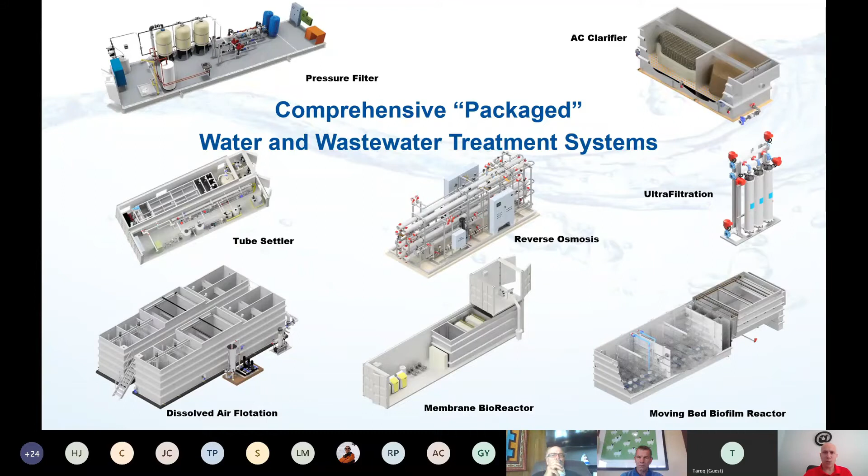So as promised, today we're going to focus on MBBRs.

Let me make sure we add everybody else that's logging in a little late. Good morning, Ken. So with that, John, if you want to share your screen and take it away. Yep, thank you, Alex. Let's switch on here. Everyone see my screen? Not yet. Go ahead. Okay. There we go. Now we're good. Good. Super.

I just would like to make one little correction. I'm not going to be talking about everything there is to know about MBBRs. We've only got 15 minutes or so, so we'll keep it brief and high level, and just move forward here to our first slide.

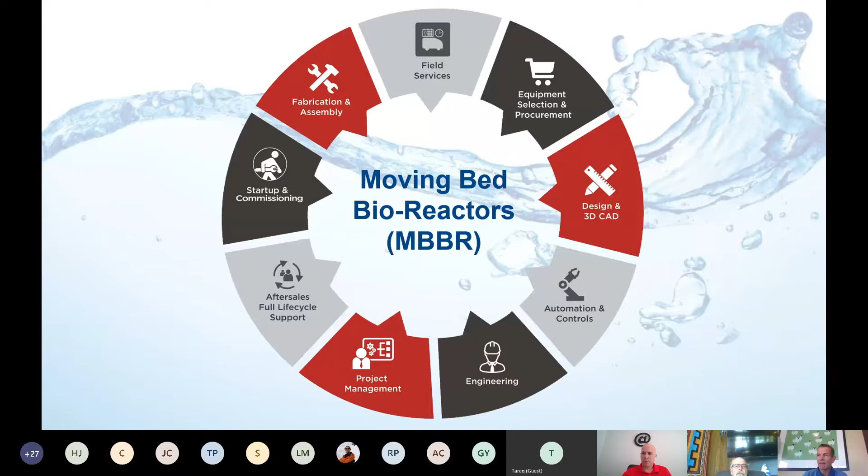So what is an MBBR? Moving Bed Bio-Reactor, or biofilm reactor. I've seen it both ways. Essentially, it's another form of aerobic wastewater treatment, typically using air blowers and air diffusers to raise the dissolved oxygen level. And everyone pretty much knows that game.

It originally was developed in Scandinavia by Kaldnes for high-strength fish waste, and over the last 40 years, it's gravitated over to North America, and it's become quite popular now for various application reasons.

The key differentiator from most aerobic wastewater processes is the use of the small carrier biofilm chips. Those chips are actually semi-buoyant, and they support the biofilm, enabling a much higher concentration of organisms within the actual tank volume. So a lot of benefits towards that.

And you'll see them popping up now in many different areas, domestic sewage, of course, but also because of the concentration of the aerobic microorganisms, they actually are very, very good for high strength waste. And I've listed a few of them there. We see them in ammonia removal, leachate treatment, and some new evolutions going on now with lagoon cold weather nitrification.

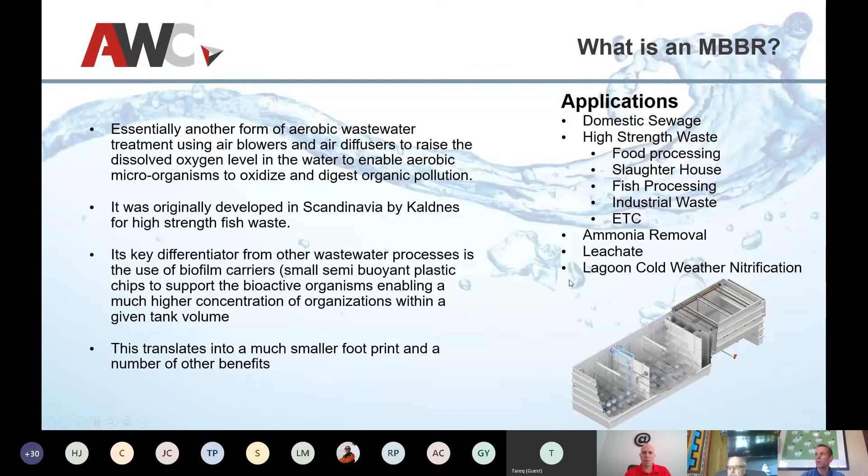So the basic components of an MBBR system is the bioreactor, and you can see here in a modular plant that we would manufacture. The first zone is an aerobic zone typically used to remove the BOD preferentially. Now, with an MBBR, if you need to nitrify, it's important that you remove the BOD first, and then the nitrification organisms can actually take over and do a very efficient job of reducing the ammonia to nitrate.

And this is typically done with these two tanks, and you'll see in the top right corner of the first tank, there's a media retention screen which retains the media in the tank, and you can see the aeration grid in blue at the bottom. So essentially coarse or medium bubble aeration is used, and in part that is to impart good mixing on the biochips to assure that they're kept agitated and sloughing the biofilm off as required.

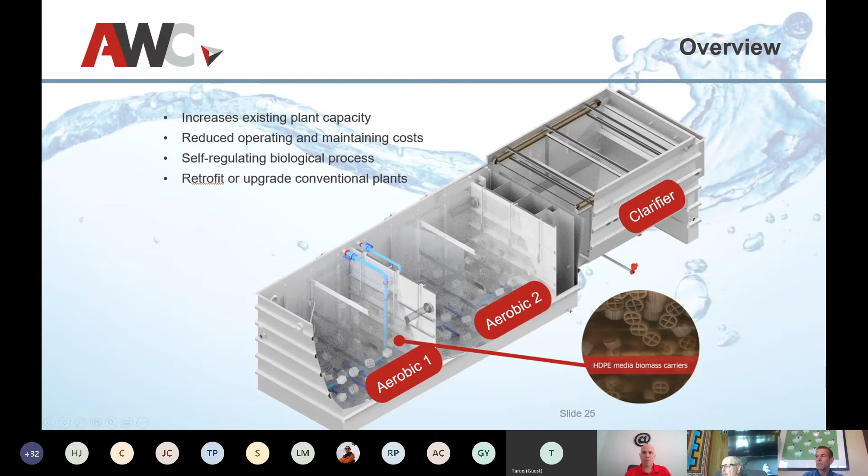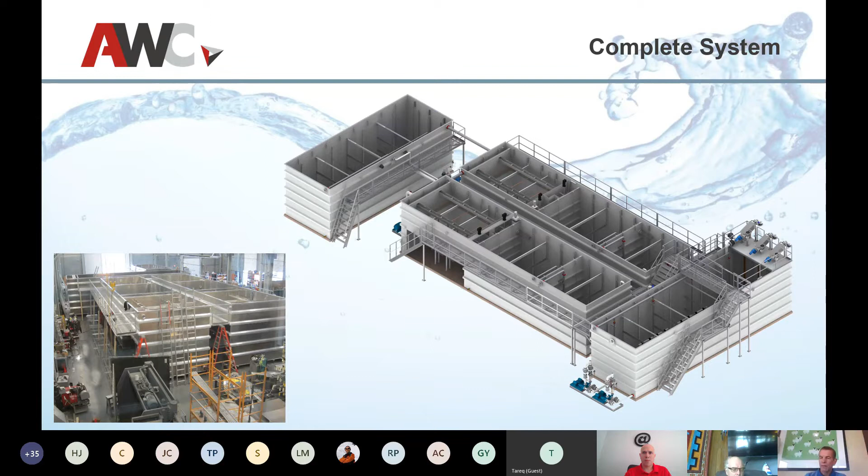The other one is the internal protected area. And you can see when you look at the biofilm chips that there's certain areas where agitation will not actually knock the biofilm out. And so that is known as the protected area. And that's important to develop the high concentrations of the biomass. That concentration is important because the more biomass that you can put in a tank and keep aerated, the higher organic loadings that you can treat within a given volume. And that's why the MBBRs are very, very popular, because they're very compact bioreactors.

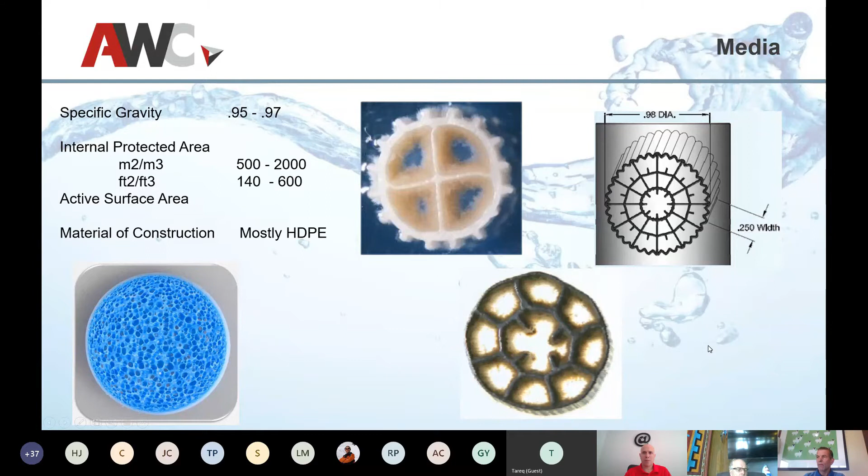Now, for nutrient removal, I have been talking about the basic MBBR, which is a straight through process. Basically, the sewage goes through once, there is no return activated sludge, and the solids essentially settle out in the clarifier, pumped out to the tank, and the clarified effluent goes to disposal or reuse as the application may require.

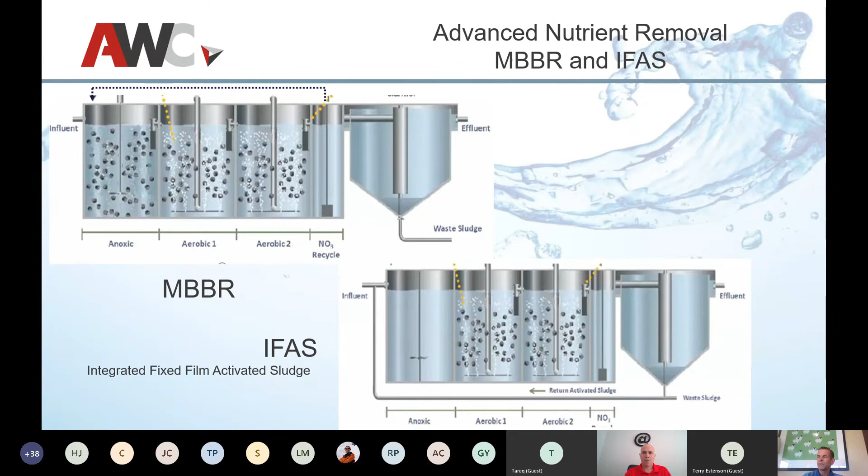So I mentioned there's a number of benefits of the MBBR. Essentially, it's a self-regulating biomass. So as the organics come in, the biomass basically oxidizes and grows cell mass, and there's a need to control, in most plants, that waste sludge operation. The MBBR doesn't require that. As the biofilm grows and it gets out of its protected zone, it basically sloughs off and is brought into the clarifier and removed. So there's very, very little you need to do to operate these plants successfully.

And that process also helps as loadings change. If we get a large organic loading coming in, the biofilm will just grow. There'll be more biofilm on the chips. As the loading drops off, the biofilm will slough off. So it self-regulates, minimizing the operational support. It's also, importantly, at steady state. You just basically keep the fluid going and the aeration on, and it's doing its job. There's no other control requirements.

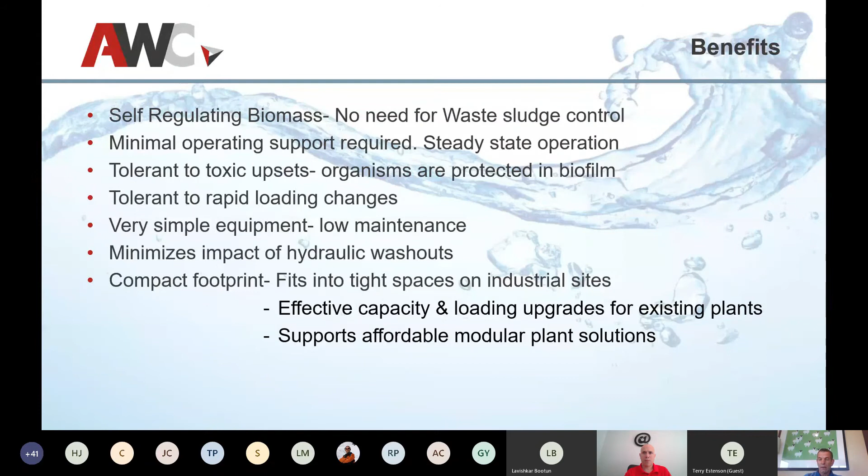And because it is compact, we can also provide these plants as modular solutions. So complete plants, relatively large plants, can be shipped direct to site for plug and play installation. So this is a large plant that we finished about 2 years ago, and it shows three MBBR trains with zone 1 and zone 2, and these were done in concrete. There's a 3D picture coming up. And it's followed by 2 modular DAF trains.

And we really like the DAF trains, Dissolved Air Flotation, for clarifiers, just because the MBBR sludge tends to be quite light and wants to float. So by far the most efficient way to remove it is with dissolved air flotation. And that also gives you a huge advantage in sludge management, because instead of getting like a 0.3% sludge out of a conventional clarifier, we're able to get 3% or more out of the dissolved air flotation, greatly simplifying sludge management.

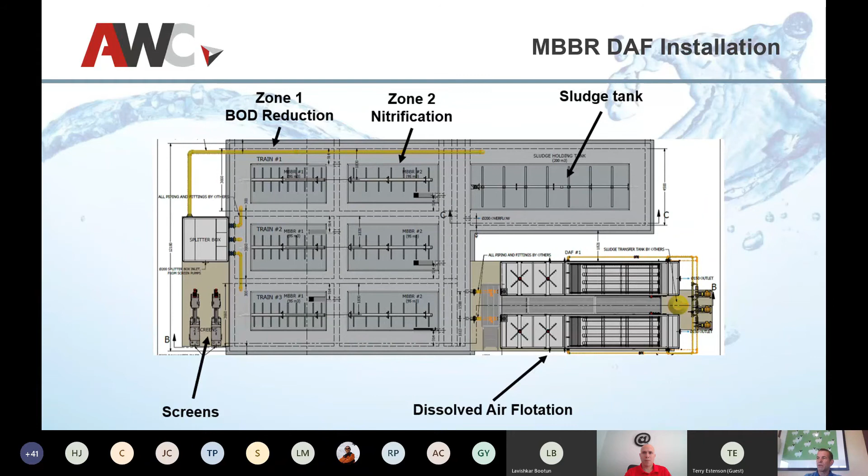There's a picture of the concrete tanks with the modular dissolved air flotation clarifiers tucked away in the corner there. And one of the big factors with the tanks is cost. Obviously, the more economical you can build a reliable tank, the more economical you can make your plant. And certainly a lot of MBBRs end up going into glass-lined, steel-bolted tanks, and they just provide a great dollar value in the sense of capacity for a given capital dollar.

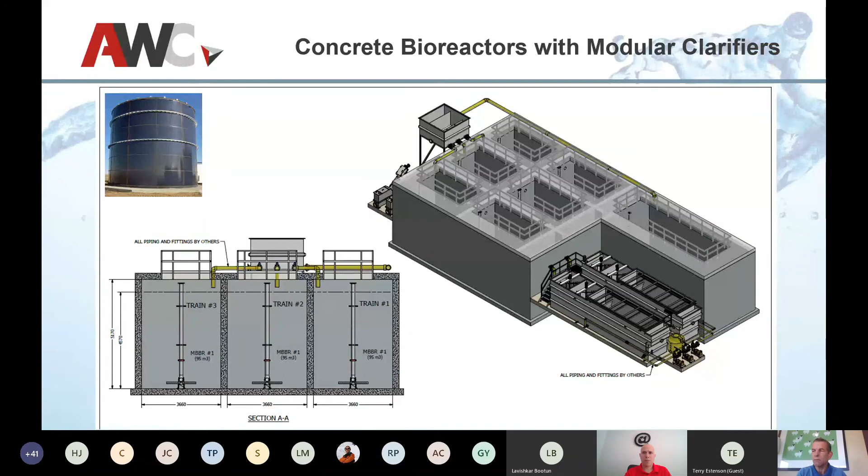So that's a quick overview of the MBBR, and certainly Alex and I are around for a few questions if you have them.